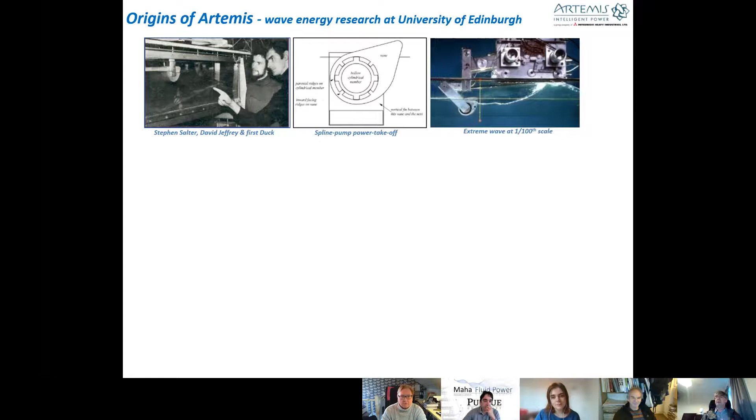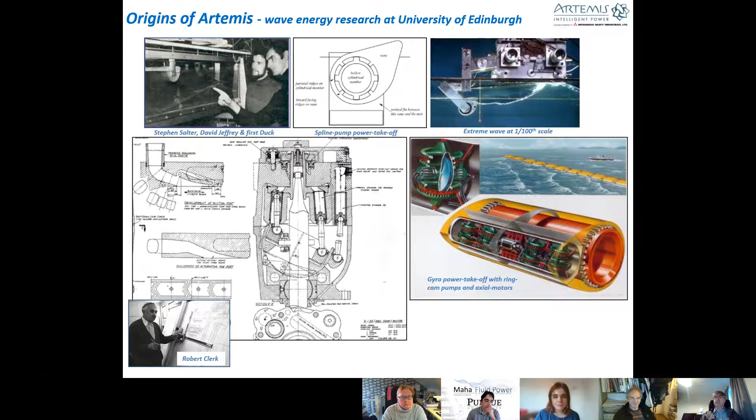The concepts really went much further ahead than the technology available at the time to implement them. Looking at the best available conventional hydraulic technology at the time, it just didn't look like it was ever going to reach the levels of efficiency and controllability required. That's how I'd put it - that was the stimulus for this invention.

So, looking at wind turbines specifically, since that's what the papers focus on, how is this used in that case? Well, most wind turbines are either direct drive or have a fixed ratio gearbox, and they try to match the varying speed of the wind to the 50 or 60 hertz of the electrical grid.

Neil's helping us out here with a very big box of power electronics, which has traditionally been a bit of a failure source. Both the gearbox and the power conversion have been serious reliability problems over time, and it was getting worse as turbines were scaled up. The other thing was that a lot of the generators being used were induction generators, and these essentially lean on the heartbeat of the grid in order to work.

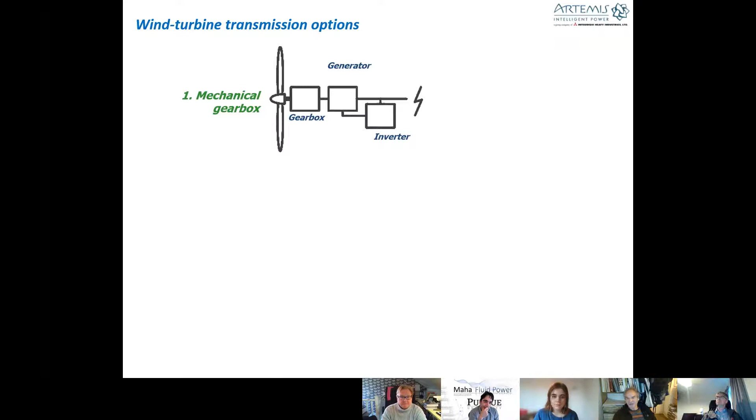So if you put too many wind turbines up in a particular area, they can actually destabilize the frequency of the grid. We developed a transmission which in principle solved all those problems and allowed us to drive something called a synchronous generator. Synchronous generators basically create the heartbeat of the grid, so they don't have that same shortcoming other wind turbines had up till then.

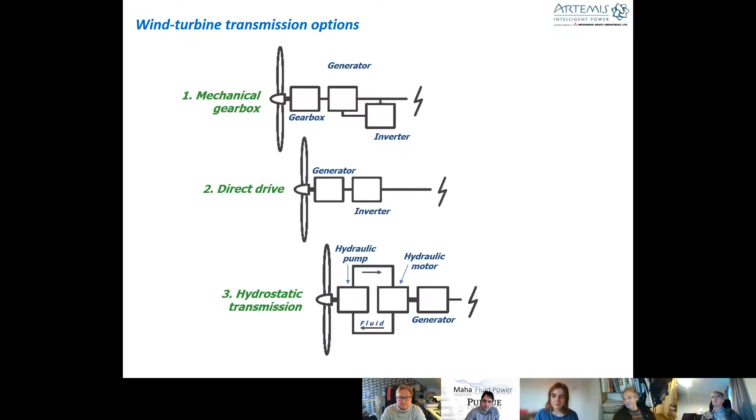But the world moves on. Artemis was basically bought by Mitsubishi at the time, who were building one of the world's largest wind turbines. As a prototype, the world's largest floating wind turbine was deployed off Fukushima with our transmission. In the lead up to the full scale, we built something about a sixth or fifth scale in our own lab, and that hadn't been properly documented.

I have two roles - I still have a role at now Danfoss, but previously Artemis, and I'm also at the University of Edinburgh. I thought, with my university hat on, it was time to actually record what we'd achieved.

Although I'm doing some of the talking right now, it really has to be pointed out that we wouldn't have achieved very much at all if Neil hadn't made a superhuman effort in getting the thing to work in Japan. At one point, he was leading a troop of about 100 Japanese engineers getting these large-scale machines working, which ultimately they did.

I've got a few more pretty pictures, actually, about the history. Wind turbines have actually been made with hydrostatic transmissions before - there was an effort in the late 70s to make what was at the time Europe's largest aerogenerator. But the problem was really the efficiency.

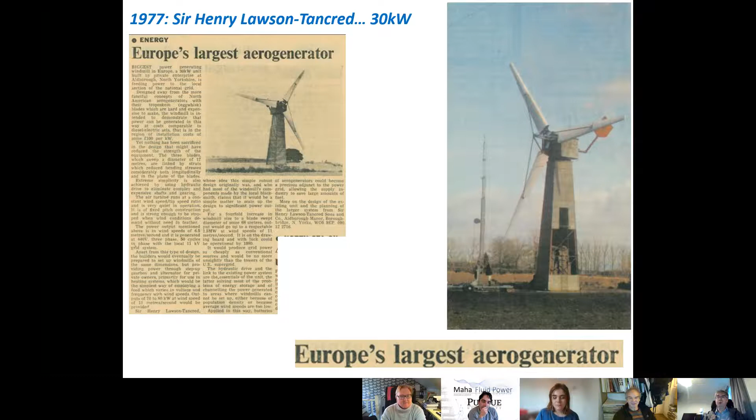They couldn't get the efficiency, the controllability, the scalability, and so we really needed to unlock that with this new technology. To be in any way competitive, we needed to be at the big scale of multiple megawatts - not just 30 kilowatts as in this case, but megawatts and above. That was a huge challenge, based on where we were at the time, with maybe a few hundred kilowatts, to make that leap to that scale.

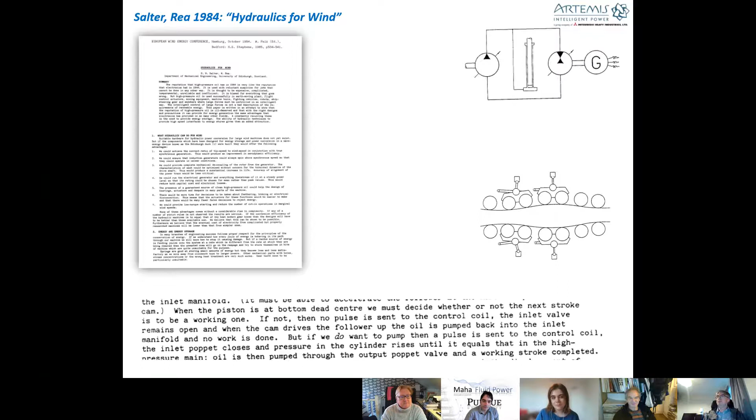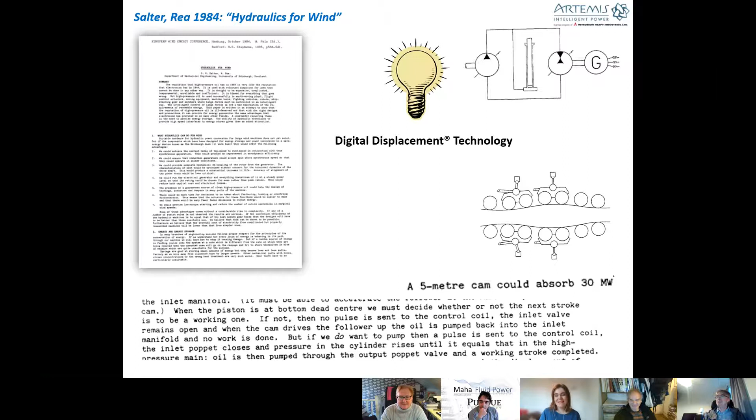But behind the scenes there was a vision from Stephen Salter from the early 80s about just how scalable digital displacement could be - he was thinking 30 megawatts at the time. One of our greatest disappointments is we didn't quite manage to reach 30 megawatts, but there's still time. So there was this vision out there that when the technology could be developed, it would, in theory, be capable of being applied to very large wind turbines. But it was unproven.

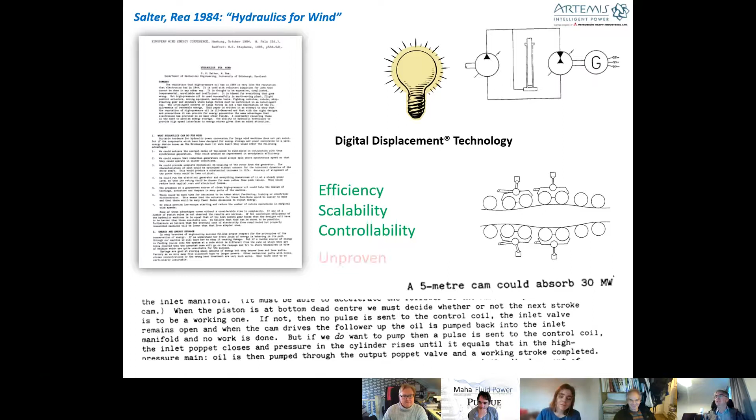So we conceived of this, and for a long time this was Win's own project in the company. There was many other things going on in Artemis. The background is that Artemis Intelligent Power was developing digital displacement technology for many different applications, and Win was very much leading the charge on saying that wind is going to be the big thing.

The basic idea is you have a digital displacement pump connected to the turbine, and a digital displacement motor which drives the generator. But the key difference with what was done before was that this digital displacement pump was to be direct driven from the turbine, so it turned very slowly, but it was also to be variable displacement, so as to have full controllability, the ability to store energy, and the ability to very rapidly respond to changing wind conditions and emergency conditions. We needed to be able to control that pump.

And that actually was a device which didn't exist. We're talking about a variable displacement ring cam pump, which really, for those in the industry, was thought to be impossible, because there wasn't a mechanism that could make it vary its displacement. So that's really what uniquely digital displacement could do: enable for the first time a variable displacement ring cam pump, and also do it at very high efficiency with very high control.

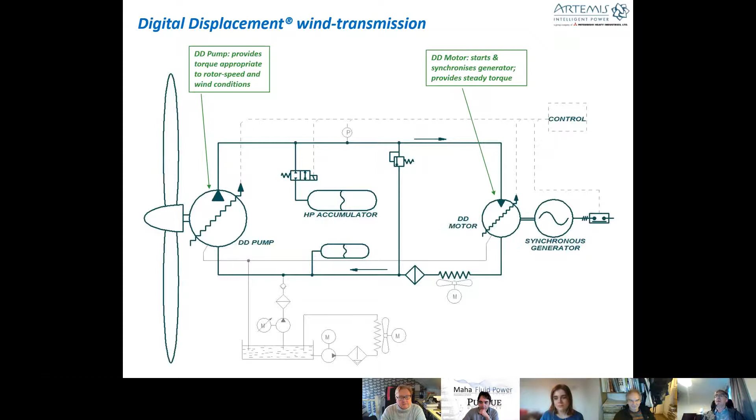So we could make this hydrostatic transmission, conceived of fitting inside a nacelle like this, and developed proof of concept hardware to prove that it could actually work. It's really this hardware that is written up into the paper, and it's the analysis of this hardware and the early test results. And it was those test results that gave confidence to Mitsubishi to invest to scale it up yet further.

So you can see two of the machines that were developed: the ring cam pump in the bottom left, and then the 800 kilowatt high-speed pump motor in the top right. Those two devices were really the core of the development in the early stages.

We started writing a paper, and we were going to do analysis of both of these machines as well as the overall transmission. What happened was it got very large and unmanageable, so we've actually decided to publish it as 4 parts. You've had the first part, which is actually the final thing, what happened when we put it all together. The second part, dealing with the analysis of loss in the pump, is 95% complete. There are 1 or 2 funny data points that we're trying to figure out how to resolve, which just create a bit of inconsistency in the data. But basically, the paper is written, and we hope to submit it before long.

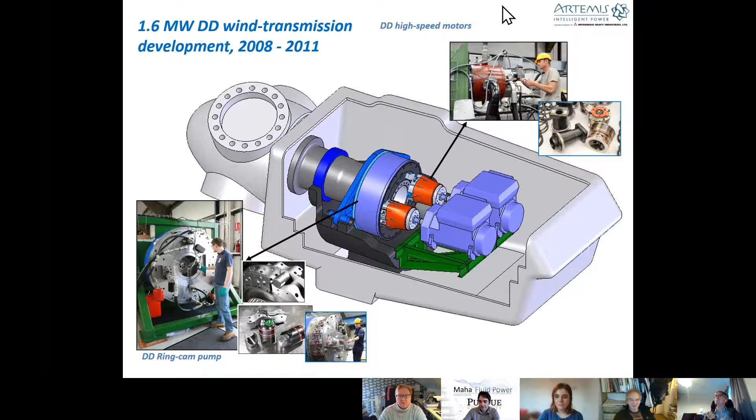Oh, great. Happy publisher. Okay.

I am curious, so when you were doing this with Mitsubishi, there were some rumors, and I was so curious, as so many of our colleagues, but of course there was not much that you could share. After a few years, can you share more? Is this a technology that, after this big prototype you put in place, do you think there is a chance they will pick it up, and we will see turbines using that sometime soon? What do you think?

There's been a lot of churn at Mitsubishi, and all the time that we worked directly with them, they kept moving the goalposts, so I'm being careful what I'm saying here. They decided that commercially forming joint ventures was a good plan, and they did one with Vestas, roughly at the same time that they bought Artemis. So there were actually 2 tracks to produce a turbine of about 7 megawatts.

The Vestas prototype was well ahead of us in terms of technical development. There were actually pre-existing 7 megawatt prototypes on test when our transmission was really still in its infancy. So ultimately, I think in that joint venture, the 2 different tracks were seen as kind of competing with one another, and ours didn't really progress that far before they committed.

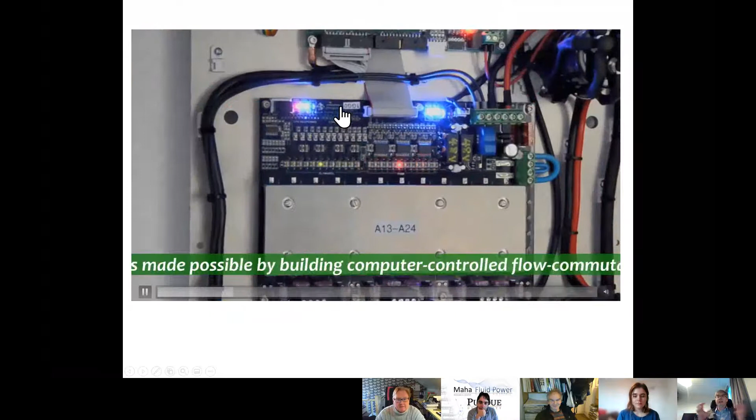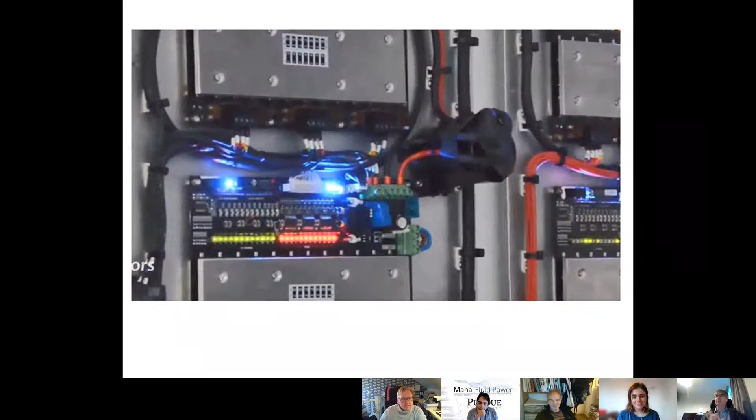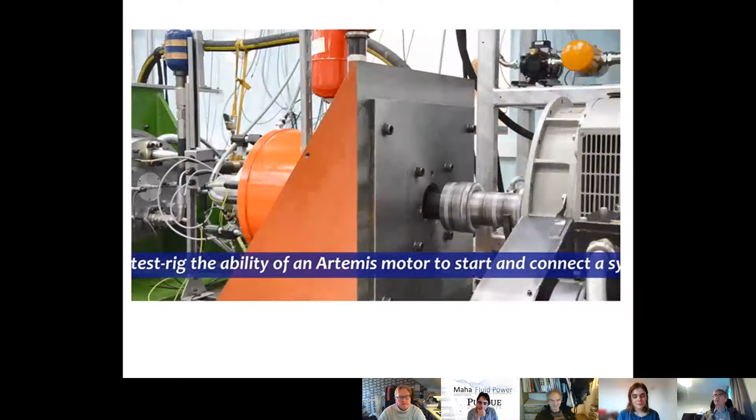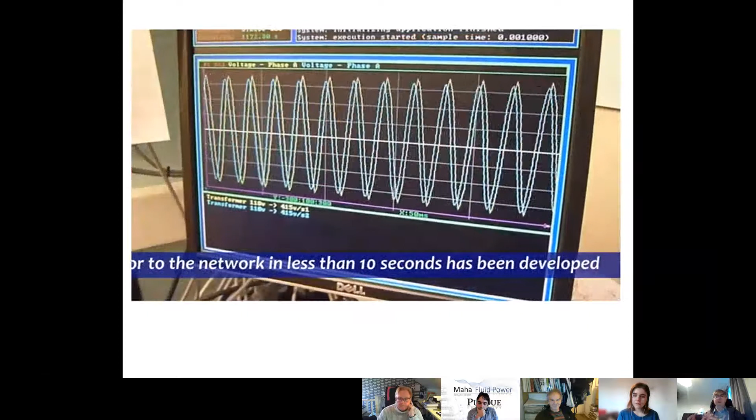This is the digital part of digital displacement, all the flashing lights — you've got to have flashing lights. Each one of these lights relates to one of the valves in the machine, controlled by a solenoid. That was the complete system, but we also developed some subsystems, like the generator drive, which handled synchronization to the grid. That was actually quite difficult to do from a control point of view, because we had to very accurately control the power output of the hydraulic motor and bring these two waveforms into synchronization, and do that within about 10 seconds from startup.

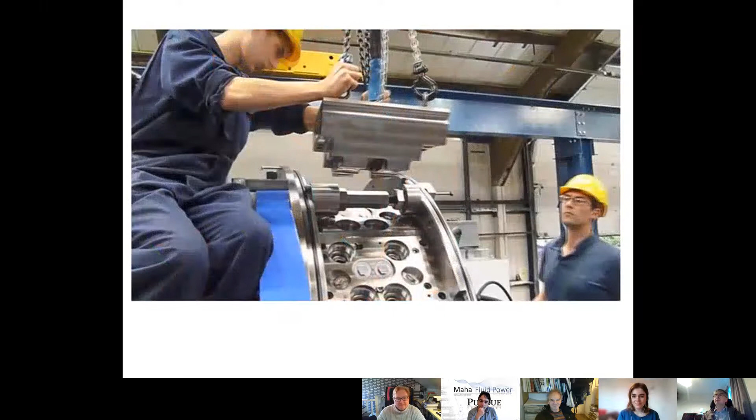So there were a number of building block technology demonstrations we had to do to give Mitsubishi confidence that the transmission could actually do all the sequences of operation from startup, normal power, and shutdown. That was another output of this test rig. We generated good quality efficiency data that's in the paper, but it also generated a lot of other case studies and simulated operation for the complete operational needs of the turbine.

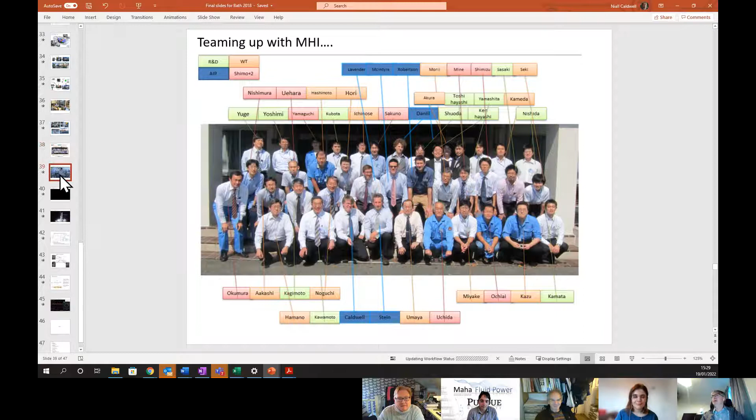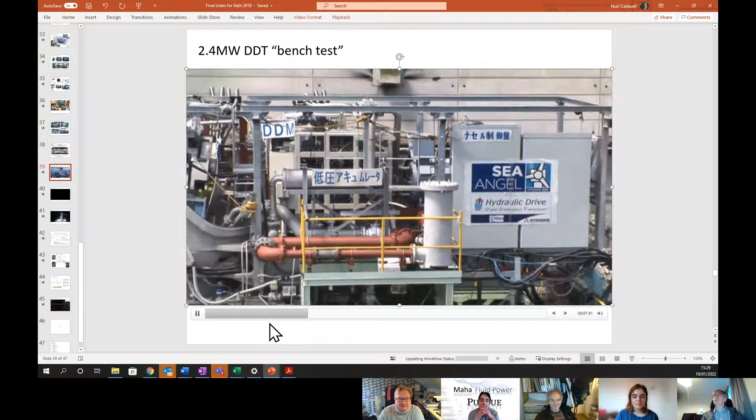Mitsubishi had an incredible resource and drive to take this onwards. Having done the proof of concept, we teamed up with a team in Japan, and a lot of faces we worked with very intensively, in very big groups. The amazing achievement of Mitsubishi is not to be underestimated, going from this first demonstrator at 2.4 megawatts in Japan. You can see the scale of the whole thing is huge, and the amount of data being generated, and the human resource needed, the commitment of people and facilities to take this to demonstration.

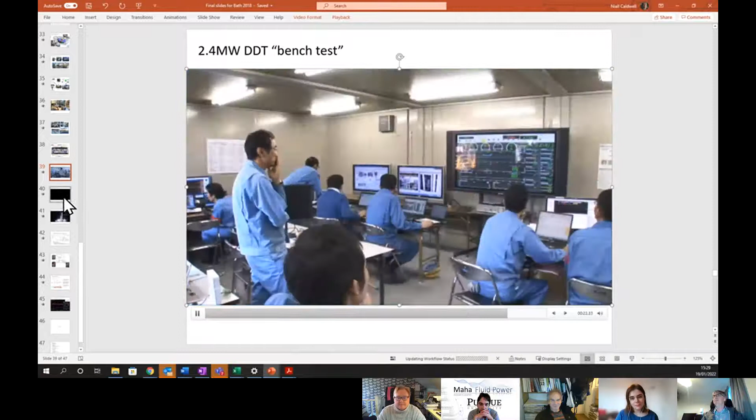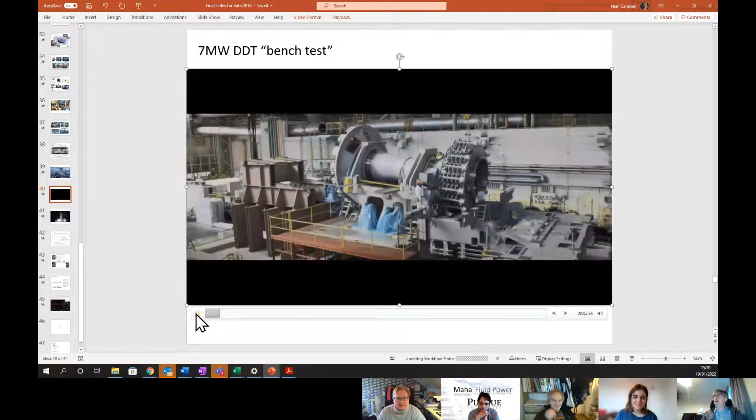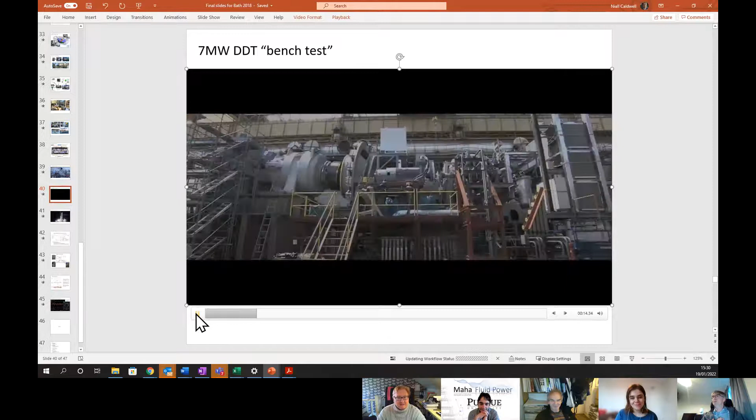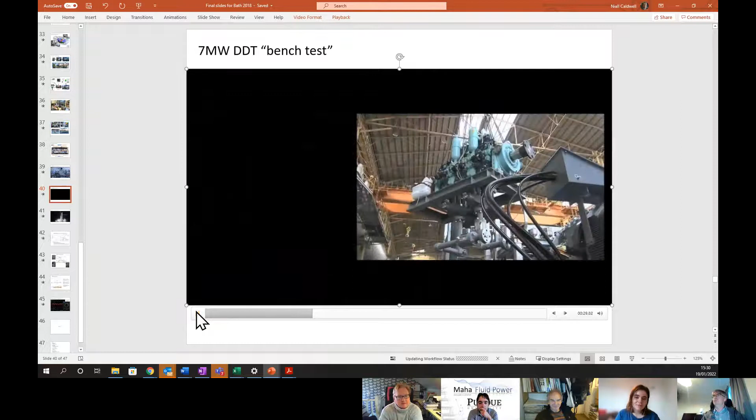Together we scaled the technology up to 7 megawatts, and then they built this machine. I remember the day I turned up and saw this, and I couldn't believe my eyes. It's the size of a house, and it's not made of bricks - it's actually precision engineered machinery, and the scale of it was extraordinary. And this is a hydraulic motor - hydraulic motors don't usually look like this, but it looks more like a diesel engine. This is a 3.5 megawatt hydraulic motor, and all of this work was being done by Mitsubishi.

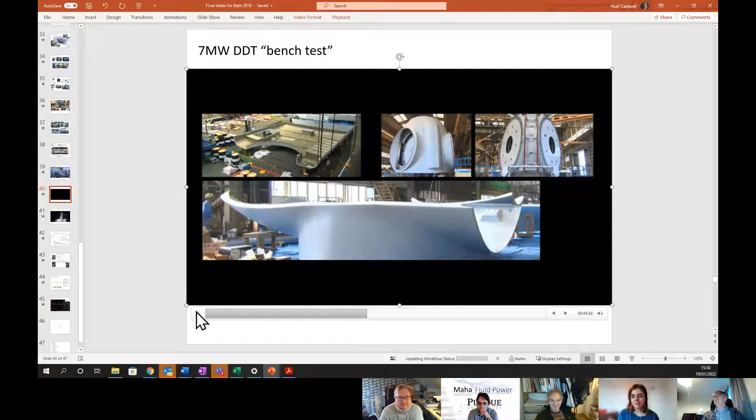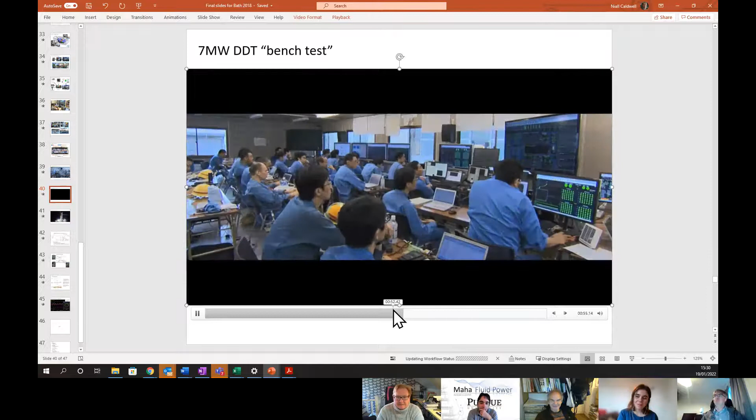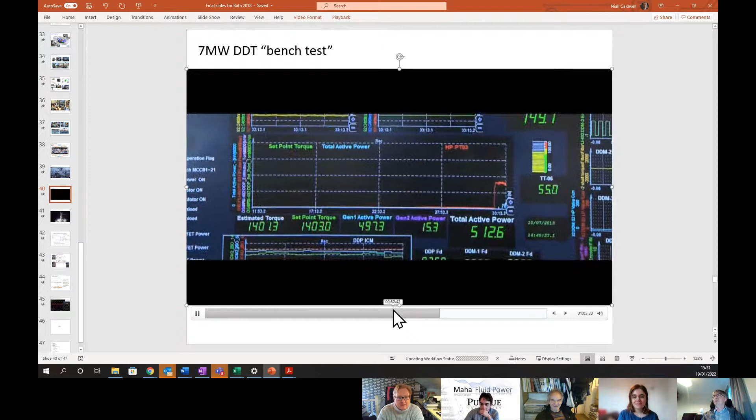For Artemis and for us, this was just beyond our ken - the scale of it, the number of people involved, just the huge scale of all these different components. Ultimately this test rig shook the ground. If you got it wrong, if you put the wrong number in a box, you felt it like a sort of earthquake through the ground. So it was a pretty awe-inspiring machine that ultimately came out of it, but also an awe-inspiring scale of development.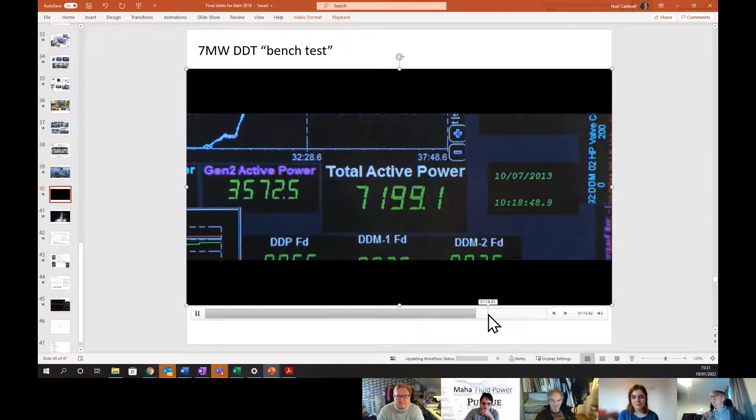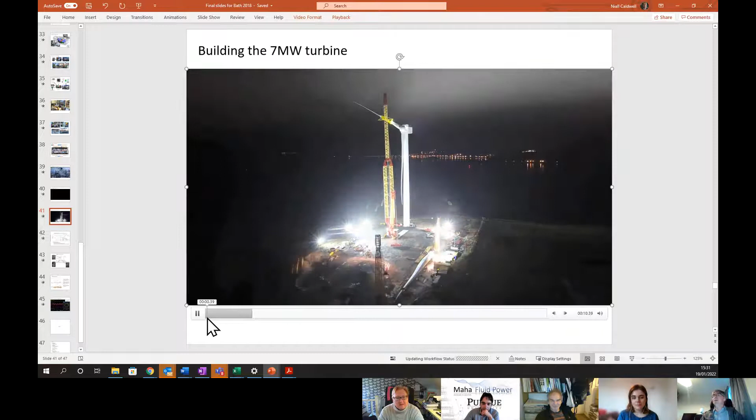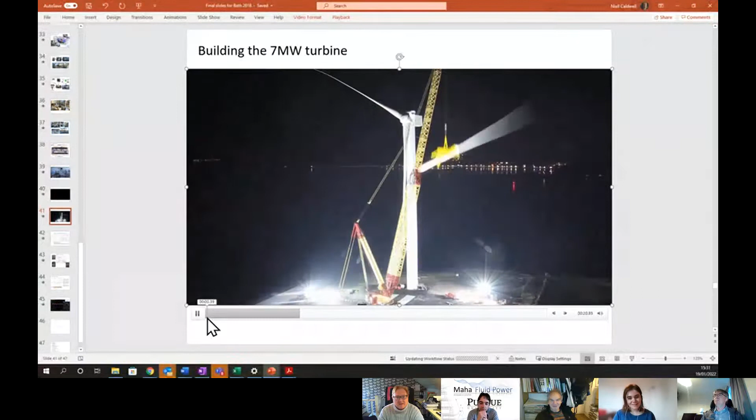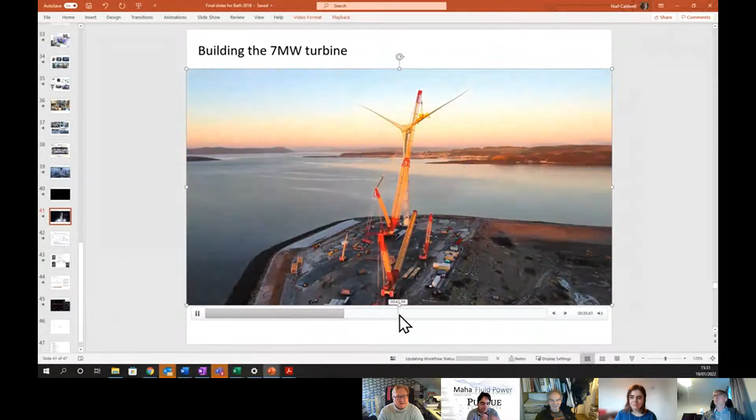Once we made the transmission and put it together with all the other elements - the blades that Mitsubishi designed, the tower, all of the balance of that system - this is what got built in Scotland at Hunterston, in this amazing sort of valley of construction that was wow, also awe-inspiring to see. It was a pretty incredible engineering display that Mitsubishi put on, and ultimately it did generate energy into the Scottish grid and indeed into the Japanese grid.

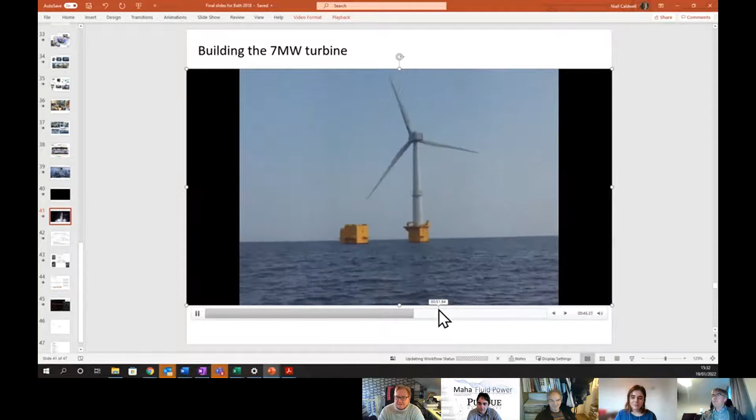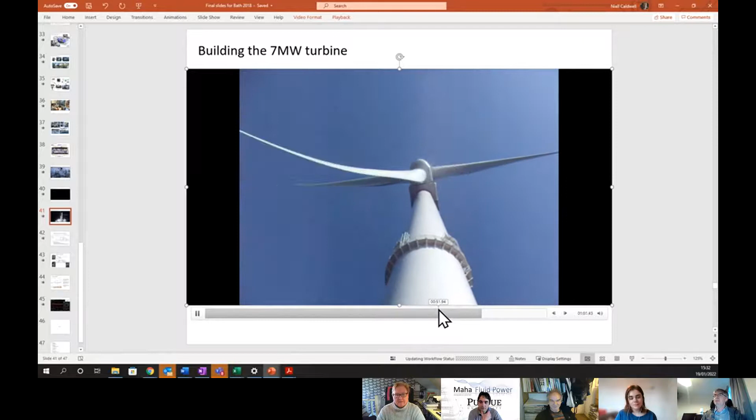So for a while it was the world's largest floating offshore wind turbine in the Sea of Japan off Fukushima. But of course they had the terrible nuclear disaster, and they wanted a new way forward, and it was offshore wind and floating offshore wind which is required in Japan because of their deep seas. So this became, for a few years, the world's largest floating wind turbine, all controlled from an office in Tokyo by Noguchi-san there.

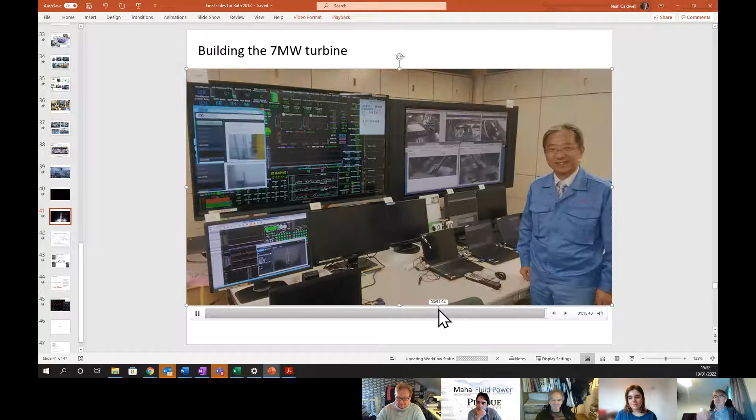So that's a little bit more background and colour to the development.

So is it still out there now? Is it still out on the system? It's not, no, it's not out there anymore. In fact, it wasn't even the transmission things that were the limiting factor. This was a 5,000-ton floater with welds - just the maintenance of that and the stresses and strains of that in the sea waves. It was incredibly cutting edge technology on lots of different fronts. So it's not out there anymore, but it did do its job in terms of proof of concept.

Definitely. So, yeah, very exciting.

But you did ask about what we're working on now, what's going to happen. I didn't quite get to that, but we're actually working now on a smaller scale. We're not really working at the 7 megawatt scale, but we are working at the hundreds of kilowatts appropriate for big off-road equipment like excavators and wheel loaders. These are machines which today use a lot of energy and create a lot of CO2 with diesel engines. If we think construction machines overall, that's about 400 megatons of CO2, about 10 times the whole of Scotland, construction machines worldwide, and about half of that is excavators.